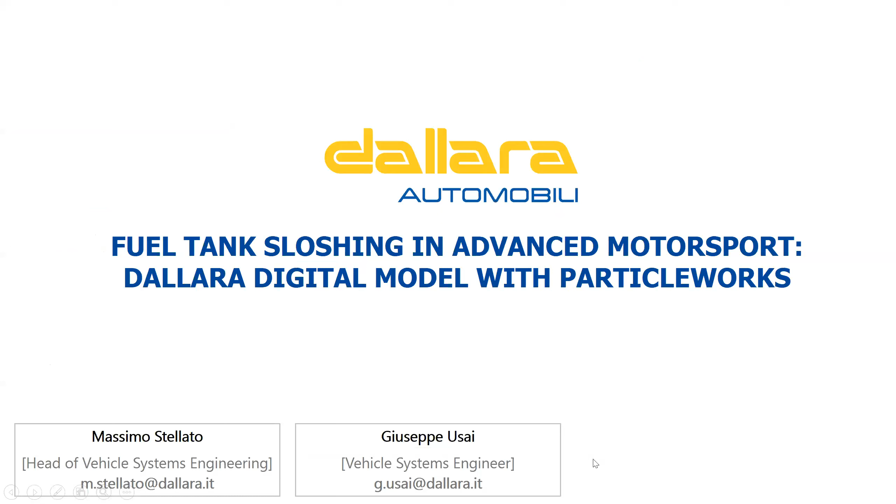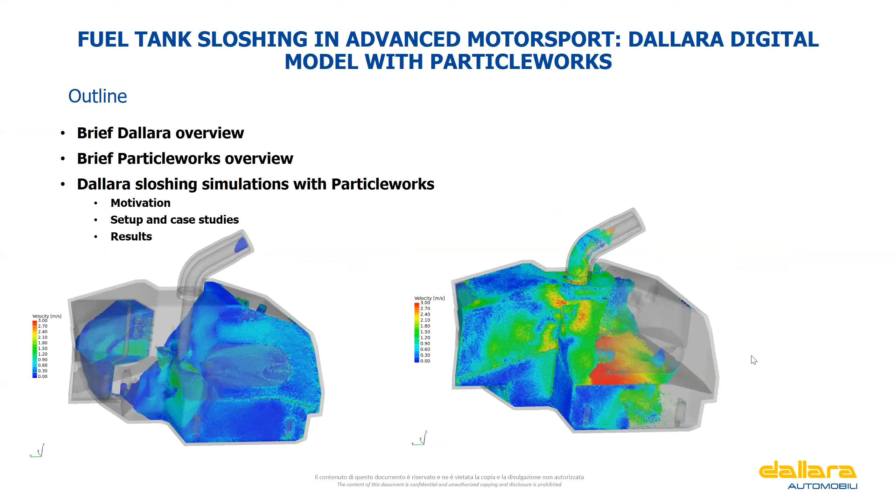I'll provide you a short outline about what we will discuss. So we will speak shortly about the Dallara overview. After that, Michele will speak about Particleworks, and in the last part, Giuseppe will go in detail about the sloshing activity.

So, Dallara, some words about Dallara. We are a community that invests every day in a sustainable way for a better future and gives support, security, and solidarity to its people, family, and its territory with appreciation and gratitude. Our mission is to design and produce the fastest and safest cars in the world.

We are around, currently, 750 employees. We export outside Italy more than 90% of our product and service.

If we see our sales by business unit, we are involved, as you know, mainly in racing, 72%, an important part in the automotive field, 25%, but also growing is the part relative to aerospace and defense, currently 3%.

Typically, our business model is production for customers, 24%, engineering for customers, 28%, and engineering and production of Dallara brand, 48%.

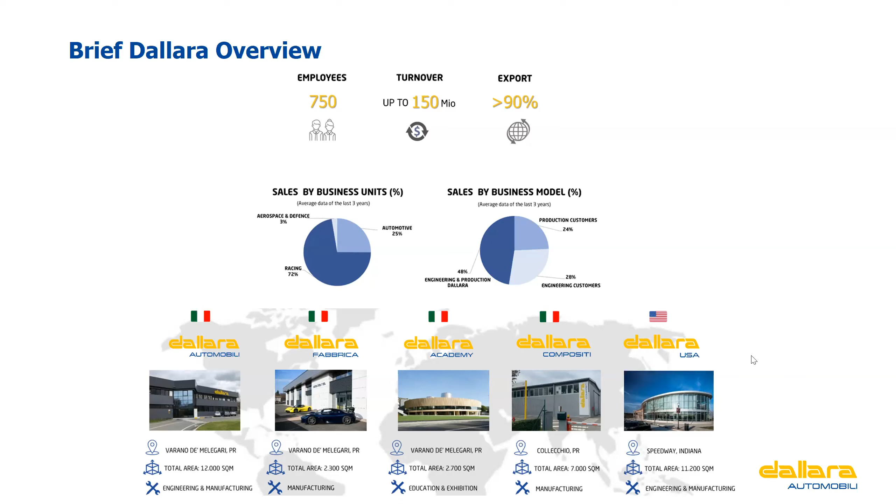Here you can see the main milestones about Dallara, which was founded in 1972. The first model was a race car, a three-seater race car. In 1978, the first Formula 3 chassis, and the next year we had the next Formula 3 car. So we have always, from the beginning, worked in this championship.

In 1984, the first wind tunnel. After that we produced the first carbon fiber chassis. We started to work in 1988 in Formula One, and in 1998 in IndyCar. In 2000, we developed the first Veyron for Bugatti, which is a very important customer for us.

In 2011, we developed our driving simulator. In 2012, we opened the facility in Dallara USA. After that, we started with DARC and Dallara Compositi, and in 2017 we produced the Dallara Stradale.

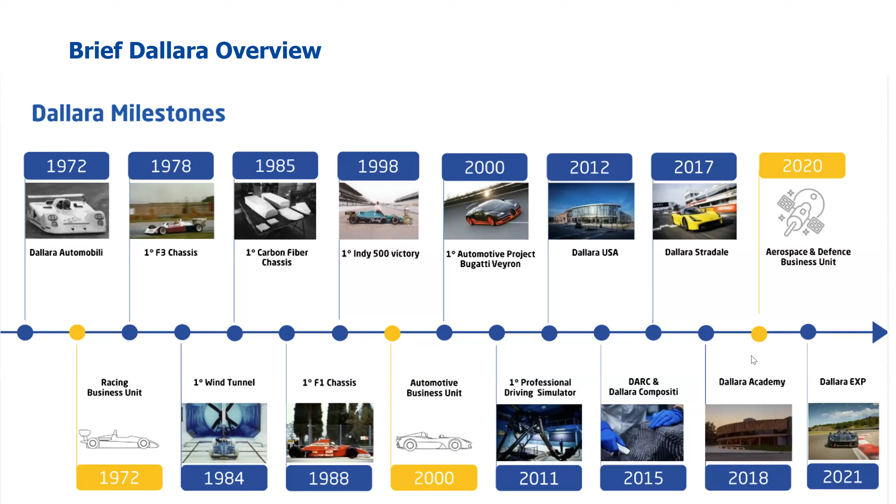Here you can see the main business units, which are racing, automotive, and aerospace. For each one, we provide engineering consultancy. We are involved with prototype and series production, service, and also race and worldwide spare parts support.

Here you can see our main competence, which are lightweight design and structural optimization. We work massively with simulation in a holistic way, so with all perimeters typically together: vehicle dynamics, passive and active cooling system, but also ICE and electric powertrain.

Another competence is aerodynamics, electronic architecture and development, production and assembly, and also indoor and full vehicle outdoor testing. We have dedicated test benches, cooling rig, chassis rig, and poster rig, but we also follow the track validation of our car.

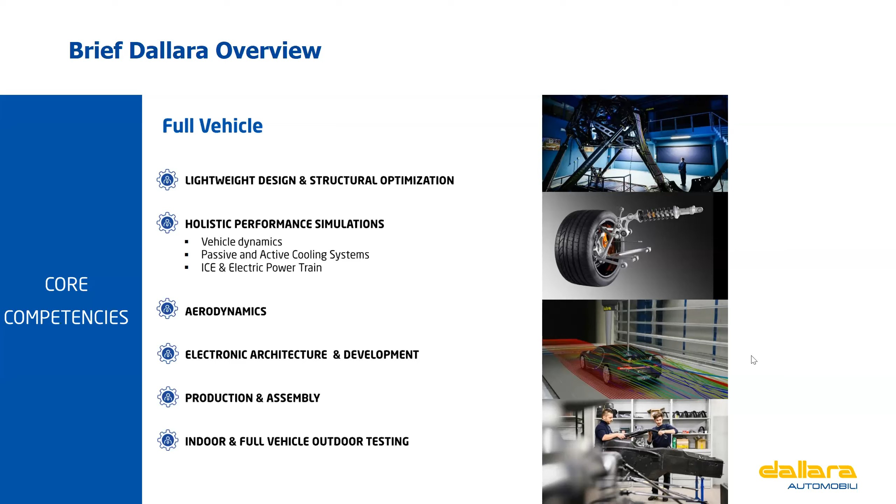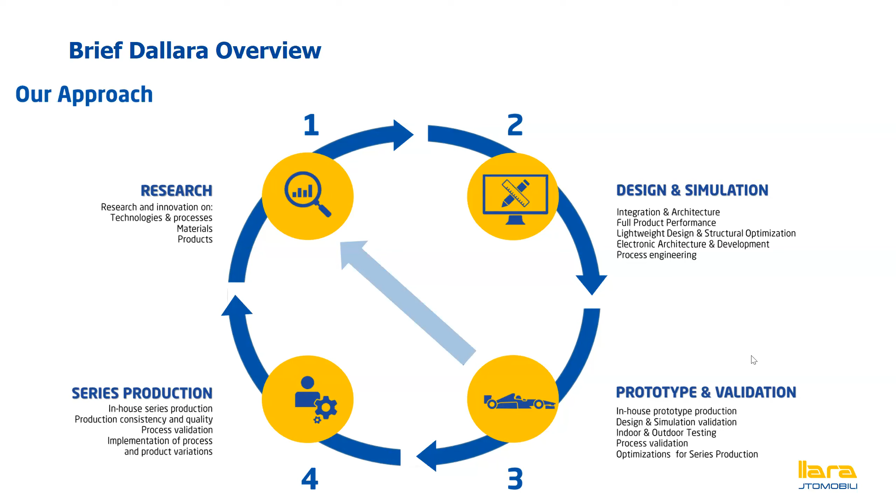Here you can see our main approach, which is very important for us. The first step is research, where we involve massively our resources, design and simulation. After that, prototype validation, and at the end, series production. There is continuous interaction between all these steps, in particular between the research and the prototype and validation.

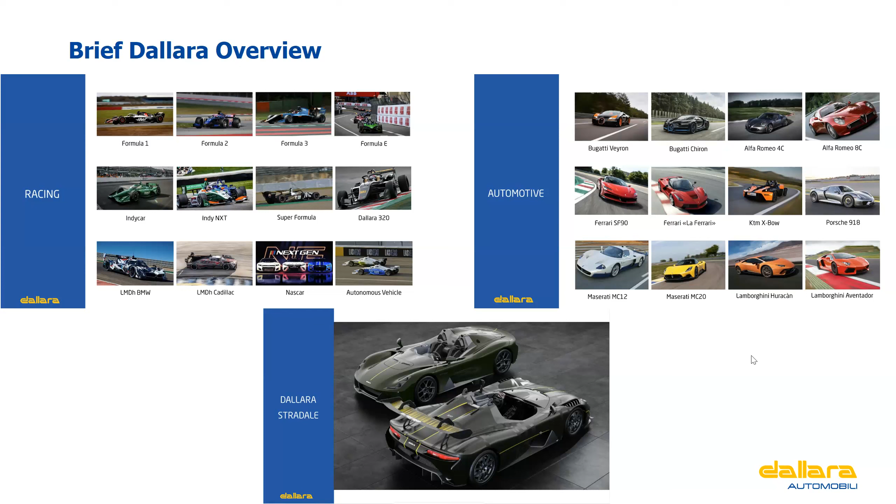Here you can see our main products, not all of them because many projects are confidential. Here are reported the projects which are public. And at the end of this last part, these are the activities that we perform inside the Vehicle Systems Engineering department.

In particular, we deal with the calculation and simulation about cooling systems to size and define the layout of ICE, electric, and hybrid vehicles. We perform holistic simulation with vehicle dynamics and systems together. The sloshing simulation is the topic that we speak about today.

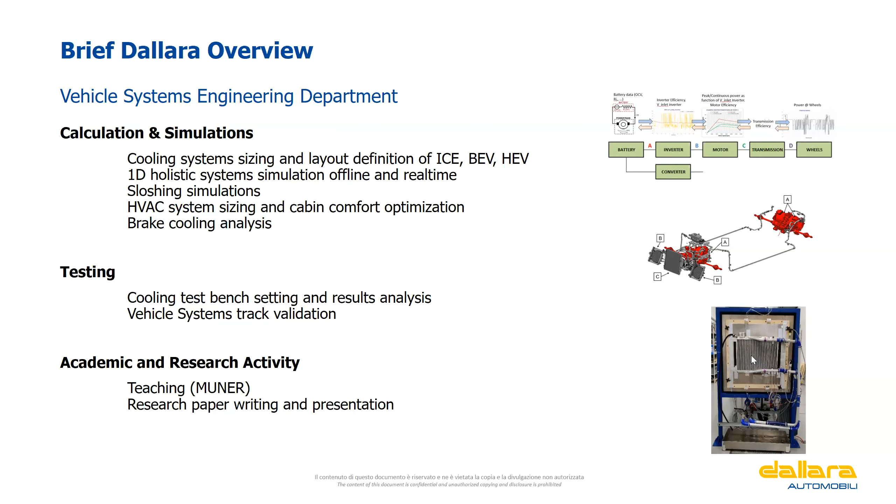Also HVAC system sizing and cabin comfort optimization and brake cooling analysis. Further than that, we are involved also with testing. Indoor testing, we have a dedicated cooling test rig where we measure and validate all our heat exchangers, but also we follow all the system validation during track test. At the end, we're involved also in academic and research activity. So we teach it. We have at MUNER a complete course about the cooling system.

Now for this first part, just about Dallara, I finished, and I leave the speech to Michele. Perfect. Thank you. Thank you, Massimo, for your kind introduction. And just please confirm that you can see my screen. Yes, we can see. Okay, perfect.

So I will just take on briefly introducing the methodology, the fluid dynamics methodology that will be used and that was used by the Dallara team. And it's based on Particleworks. So Particleworks is a meshless CFD, computational fluid dynamics tool that is widely used in the automotive sector.

The method is a meshless approach based on moving particle simulation. So it basically solves all the traditional CFD equations, but with a Lagrangian type of approach. Basically the fluid is discretized automatically by the software into particles, and those particles are tracked during the solution. So we can see here that whenever we have a system with complex geometries, splashing and sloshing, or acceleration that will cause the fluid to move around in a gearbox or in a tank.

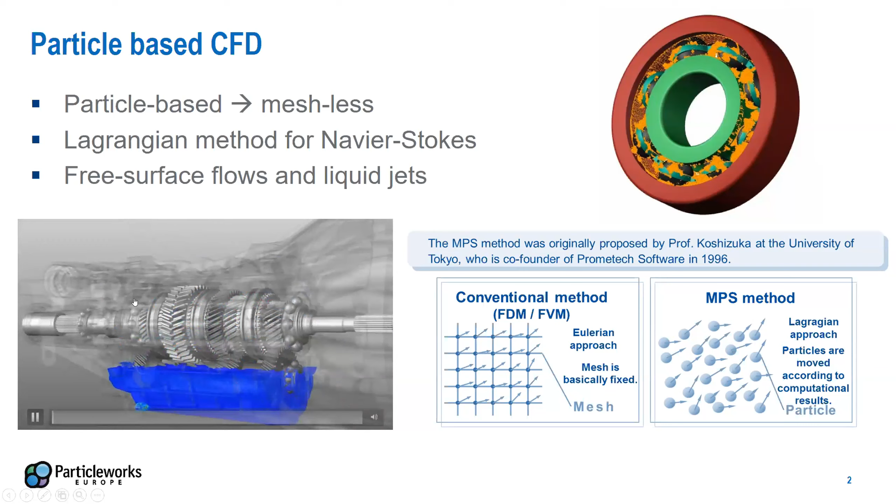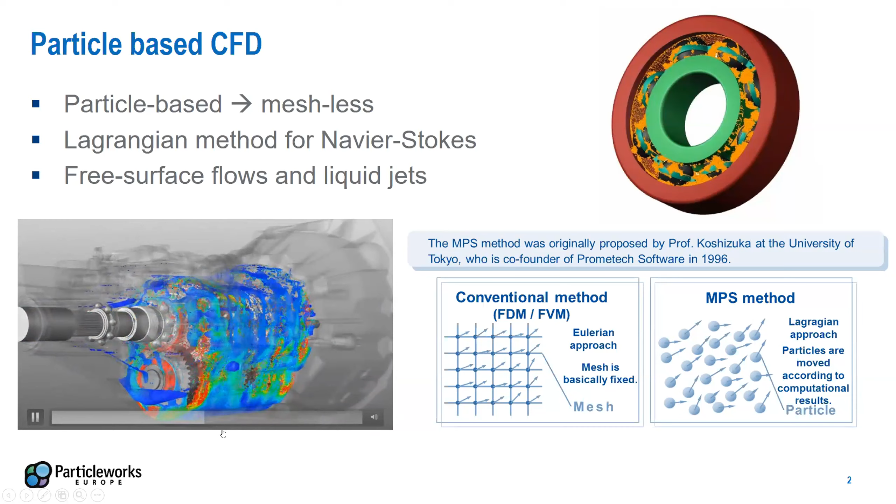So for this kind of system, really this method, as compared to conventional mesh-based CFD, can show real advantages. In fact, the pre-processing steps are much shorter. Usually we can directly work with the geometry as complex as we would like. And the hardware time, the simulation time, is actually way shorter whenever we are dealing with the flows that I mentioned, so splashing phenomena, sloshing, and so on.

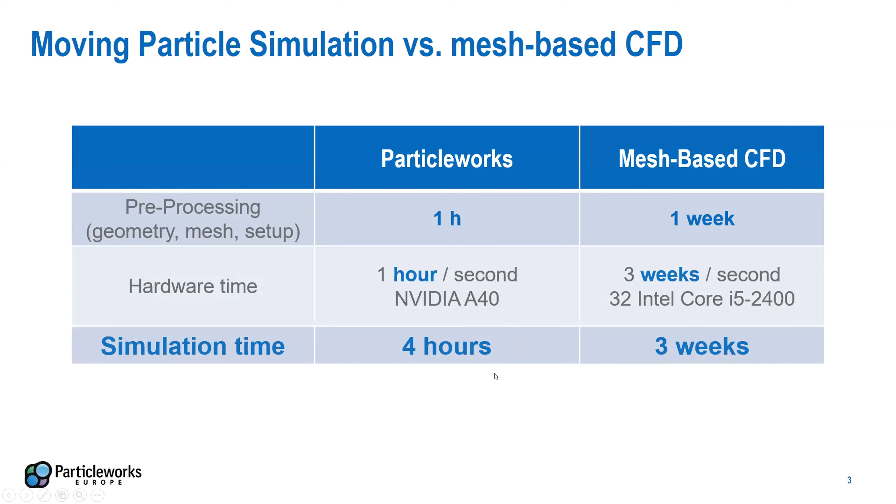So for this kind of application, as compared to mesh-based CFD, we are looking into hours, or let's say 1 day of simulation instead of weeks. So in general, the features are that we don't need to prepare the CAD for simulation in this method, so we can directly import it, and that was done with the Dallara fuel tanks.

It's very simple to model the fluid dynamics, so we don't need to have CFD experts or engineers specialized in numerical modeling for this kind of system and application. And we can also leverage GPU computing, graphic card computing, to speed up the solution of our simulation, because the methodology itself can be parallelized very efficiently.

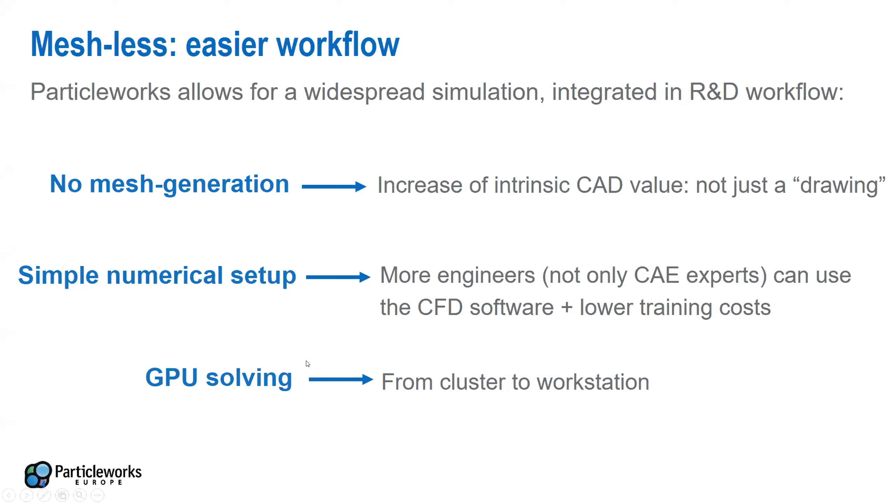So showcasing a little bit of the features of the software that will be discussed, one important feature that was integrated in the sloshing simulation is the ability in Particleworks to discretize solid elements with particles. So we are not only dealing with the fluid and the fuel, but as you can see in this example, we can handle solid material. In this example are screws floating and experiencing the fluid forces. But in the example that will be discussed are Teflon spheres integrated in the tank and interacting with the fluid.

So this is another feature that is very interesting and that was used by Dallara to improve their design. Effectively, you can build a fluid structure interaction between the fluid phase and the solid phase in one digital interface, in one digital solution that is Particleworks.

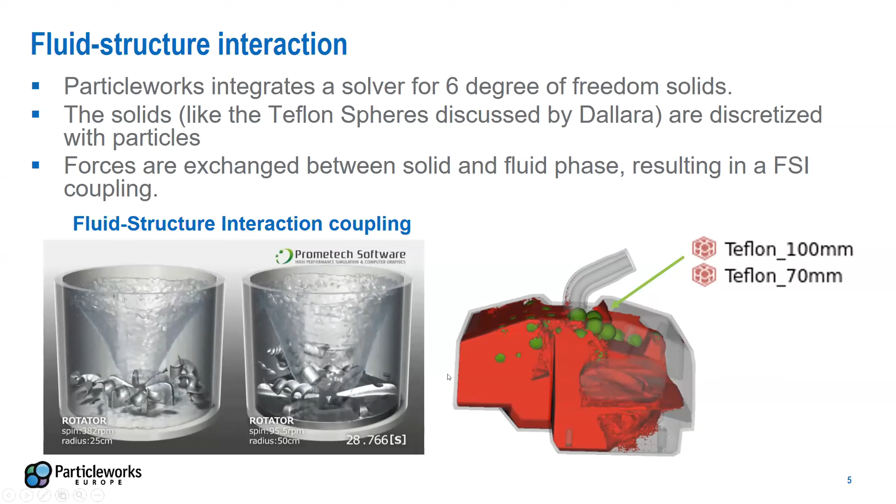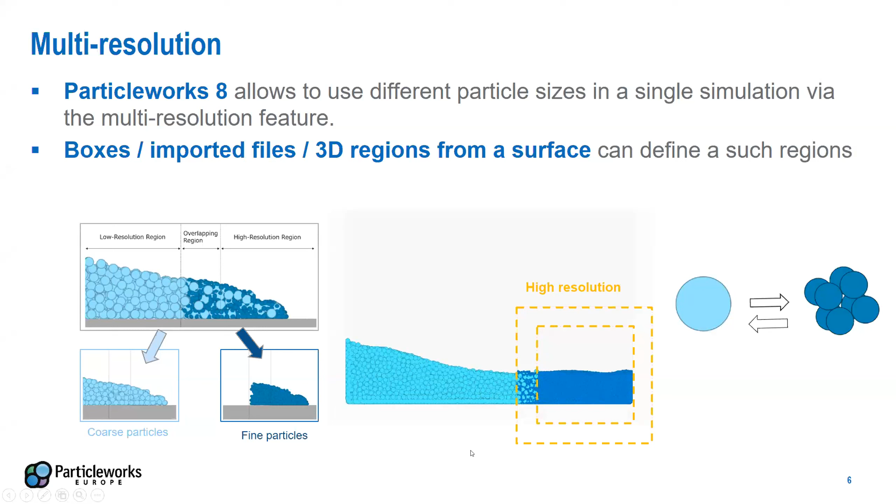So effectively, we improve our computational time instead of having to solve for all the fluid domain with the very small particle size needed to capture the flow near the pump. With Particleworks, we can define region boxes, or actually we can import files defining the custom shaped region we want to have for this kind of high resolution area.

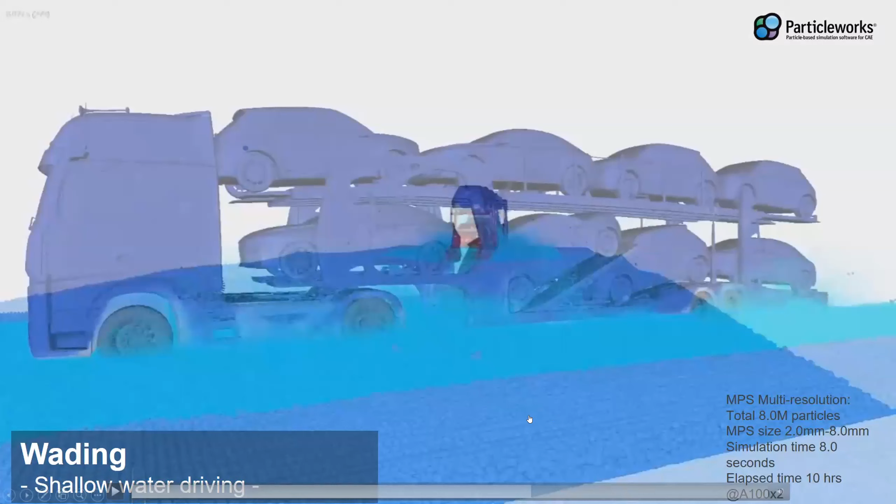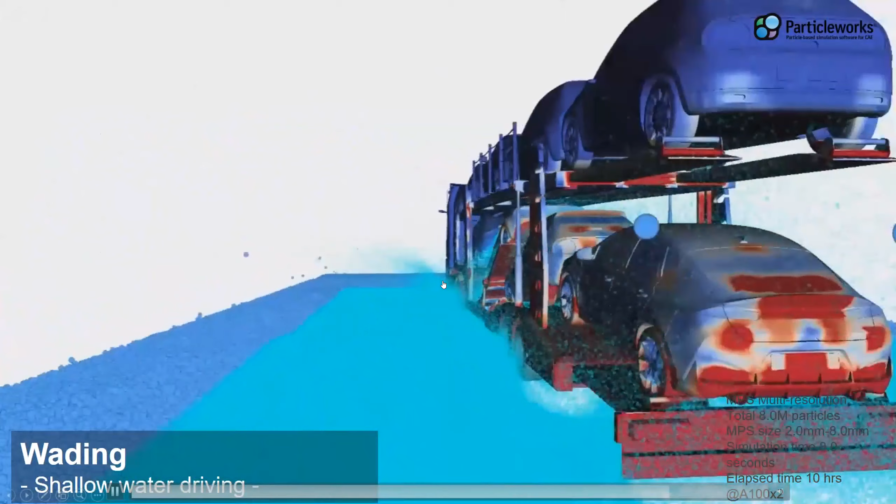Here is an example in vehicle, external vehicle contamination and interaction. So we have some wading of a big truck with a lot of cars on top of it. And as you can see, maybe you can appreciate that farther away from the truck, we have bigger particles that are refined and meshed with a smaller feature very close by to the truck. So in this way, we have better splashing phenomena very close to the bodies, but where we don't need high resolution, we just keep the particles a little bit bigger.

And here is another example for a wading type of application. Basically, we want to analyze the amount of water that could be intaken by the car body, and that could enter the cooling system, for instance, from the front of the car.

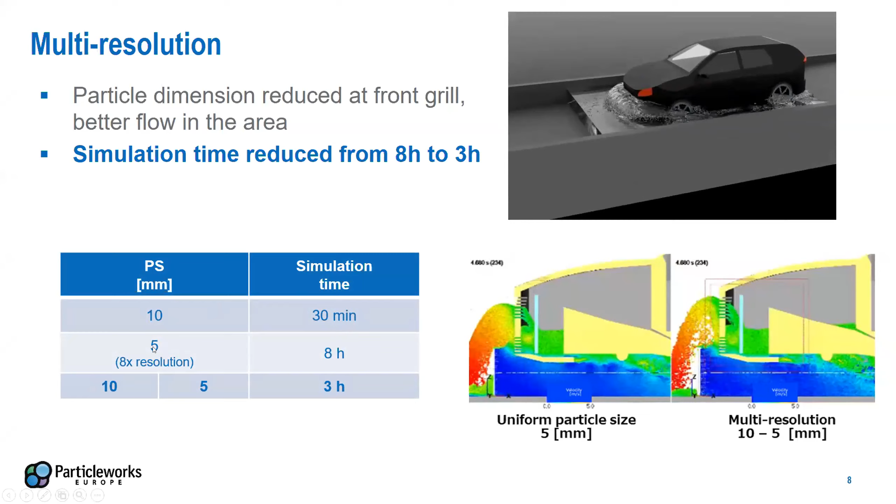As you can see here, we could have very small gaps that would need a particle size of 5 millimeters, in that range. But if we discretize the entire fluid domain with that particle size, we are looking at 8 hours of simulation time for the whole simulation.

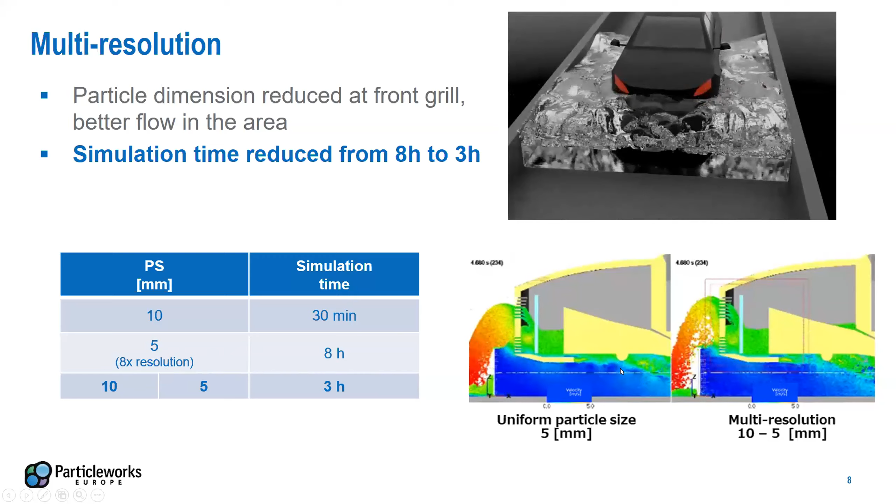If we take advantage of the multi-resolution approach, you can see here the box. We can define 5 millimeters only inside the box, and overall we reduce the simulation time by a factor of 2 or more, while guaranteeing that the higher resolution is present in the desired area.

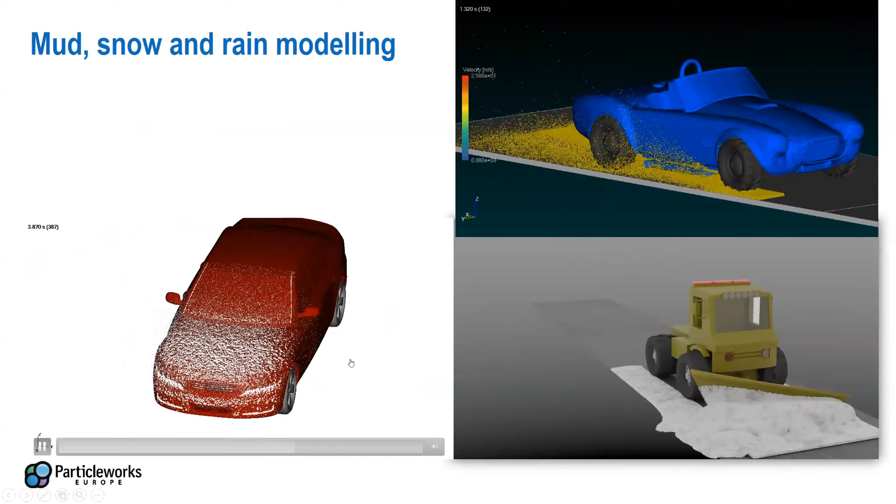In terms of physics, we don't only simulate water or Newtonian fluids. We can integrate snow, mud, with different types of modeling, also rain simulation. What you see here is a transient air field, computed again inside Particleworks. So the software can handle fluids, but also air simulation, coupled or solved beforehand. We can integrate different physics, different phenomena, in one workspace thanks to that.

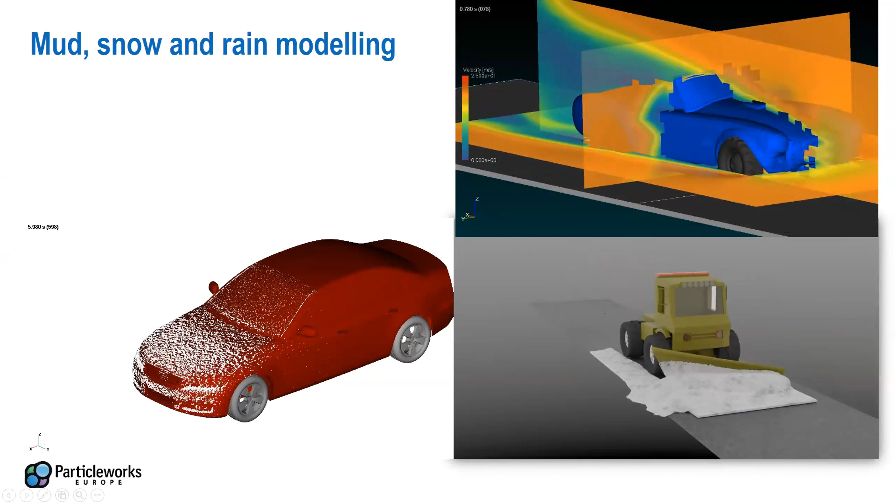So this was it on the features. Again, I focused on vehicle application. Of course, there are many other applications in terms of transmission, bearings, lubrication, e-motor cooling, or other fields not related to the automotive sector. But since today we are talking about vehicles and motorsport application, I just wanted to give an overview of the application in this direction.

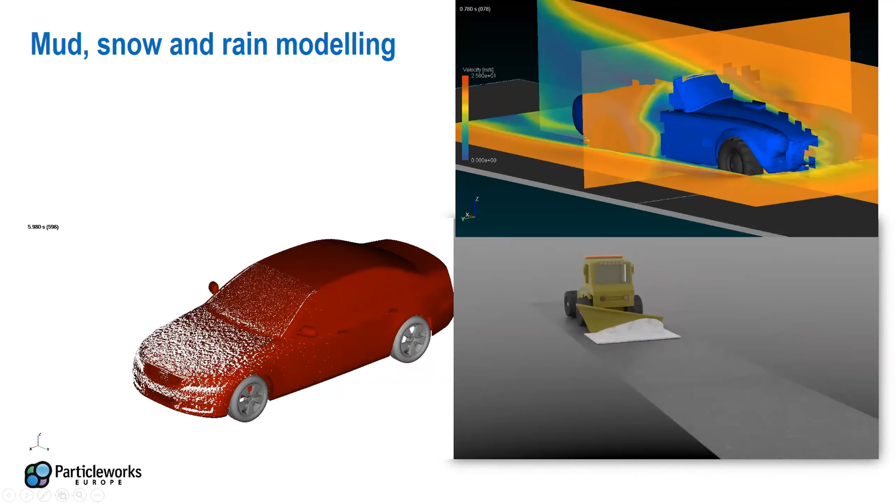So now I will stop sharing my screen and give the floor to Giuseppe for the main results.

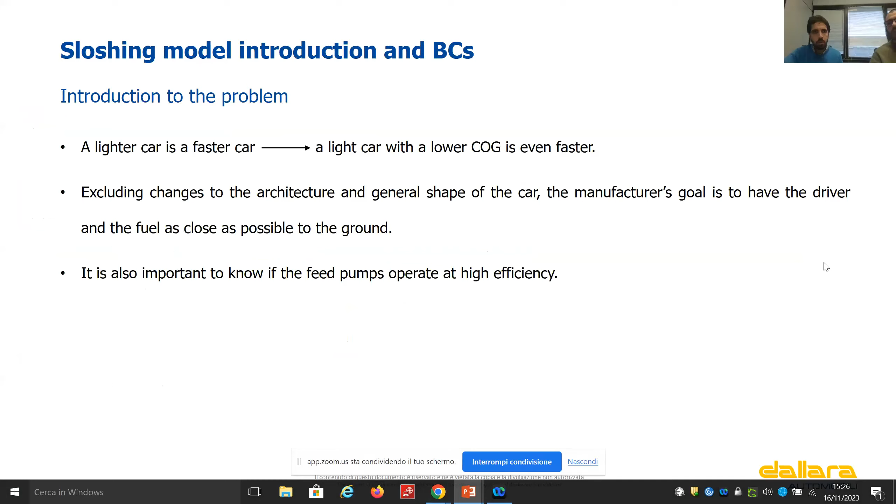Very good. Okay, you can hide maybe the bottom. Yes, at the bottom. So, yeah, perfect. Thank you. Okay, sorry for the inconvenience. Sometimes it happens.

So I was saying, I wanted to give a small motivation to explain why we need such tools in our products. Of course, the first point of interest is to improve the design, meaning in our case to limit the fuel center of gravity movement and also to maximize pump efficiency.

This is mainly a problem of reliability for the whole car, because the fuel needs to go to the engine. We don't want any engine cut off at any point in the race, even when only a few liters are left in the tank and the car is about to go into the pit stop.

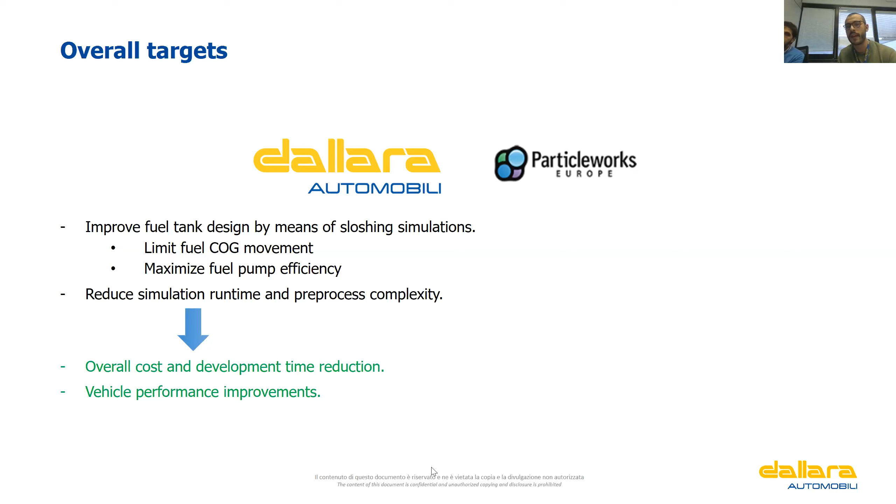And the second point is to reduce simulation runtime and pre-process complexity. In fact, as I will discuss later, we used to perform such simulations with traditional CFD tools using common finite volume methods. But then we decided, with the support of Particleworks, to test the software and see if we could actually have an advantage on the track.

So why do we need such simulations? Everyone knows that a lighter car is a faster car, but on top of that, if we have a light car with a lower center of gravity, the car will be even faster. So it is important to study how the center of gravity of the car evolves around a lap.

And of course, we have the two contributions: the center of gravity of the car itself, the chassis, and then the one of the driver and of the fuel. So excluding changes to the architecture and general shape of the car, our goal as manufacturers is to put the driver and the fuel as close as possible to the ground.

And by that I mean that if I'm designing a GT car, I can't have the driver seated as in a formula position, and we have to follow a lot of constraints given to us by the organization, often the FIA. So on top of these constraints, we try to limit the fuel sloshing and have the driver seated as low as possible.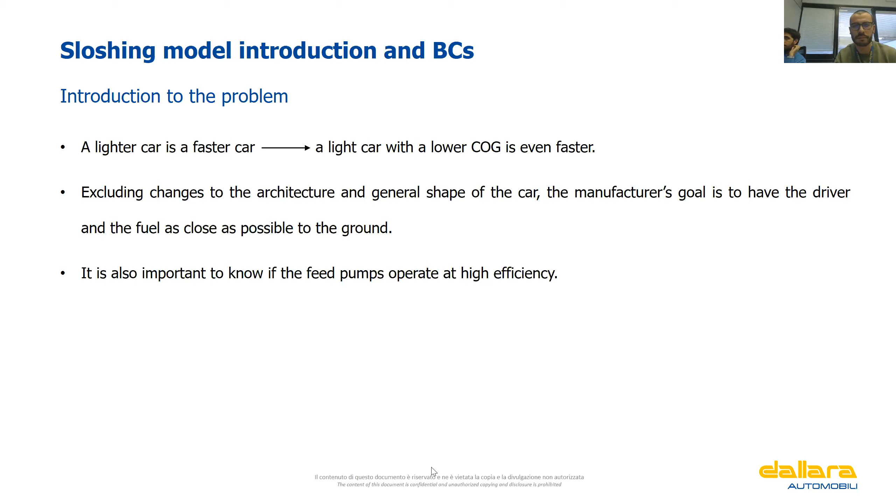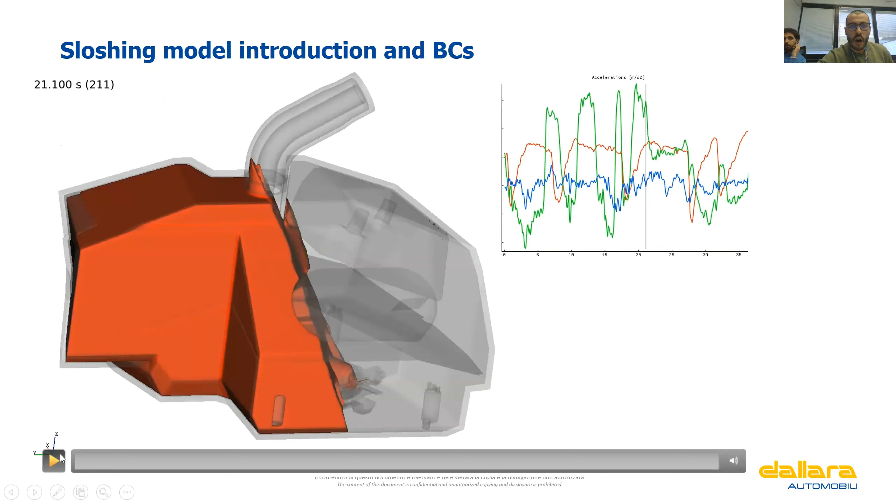This is a portion of one of the simulations that we performed. On the right, you can see the acceleration profiles. In blue, the vertical acceleration, that is this direction. You can also see the axis on the bottom left. With red, the x direction, normal to the screen surface, let's say, and then the y direction, that is the lateral direction.

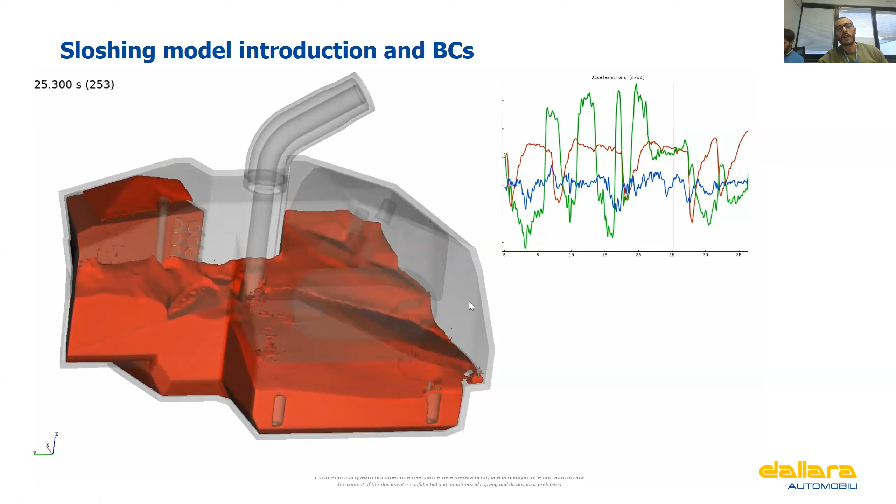So in this small segment, we see a portion of accelerations in which the car is first in a stable condition with almost constant lateral and longitudinal accelerations, and then we have a rather strong transition with heavy braking, then acceleration, and then also cornering, first to the left and then to the right. And we can appreciate here the result that we obtain through Particleworks.

So now, going more in detail on the boundary conditions.

First, we performed a particle size sensitivity study, with the same boundary conditions apart from the particle size. Here on the right, we see the 4 simulations that we performed at the start, and the only difference between them is the particle size.

As a consequence, the time step changes, because that's directly related to the particle size. As the particle size increases, you can see that the time step also increases, and this translates into a lower number of particles, but also, at the end, a lower simulation time.

On the left instead, we can see the inputs and outputs of the process. Of course, we have as an input a geometry that is an STL file of the whole tank, with all the components modeled inside.

We also need the fuel properties, that means fuel density, viscosity, and surface tension. That's really important, along with the acceleration profiles that I will briefly discuss in the next slide.

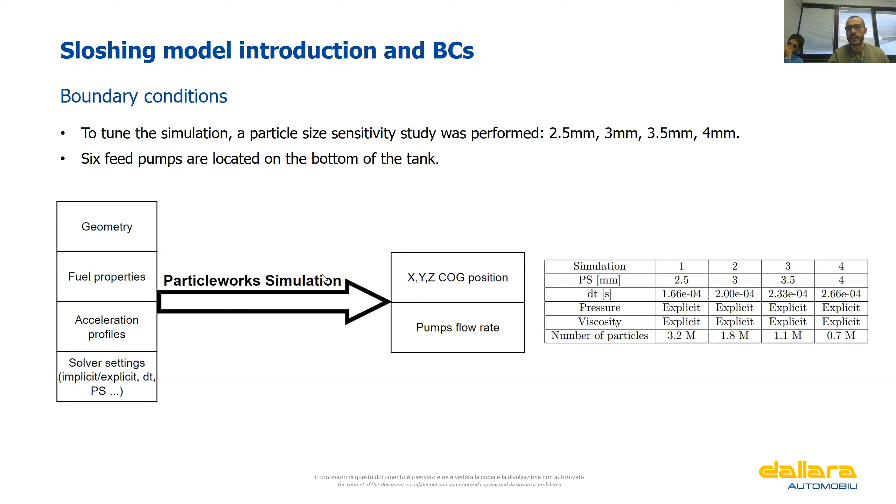So a bit of a deep dive into the acceleration profiles. We set up a 35 second simulation in which the accelerations are varying with time, of course.

This in particular is not a full lap, but is a combination of corners that are deemed representative of the sloshing problem. This means that maybe a lap is

1 minute and a half, but maybe I spend a lot of time in a straight where basically nothing happens. The car is accelerating in a straight line, no lateral accelerations, and after I am out of the corners, the longitudinal acceleration is not enormous, so there's actually no need to spend resources in simulating a condition that is most likely not a problem for the car.

So we selected some corners. Here we can see in blue the lateral acceleration, so we can see some very demanding corners with fast left and right change of directions, together with acceleration and braking phases.

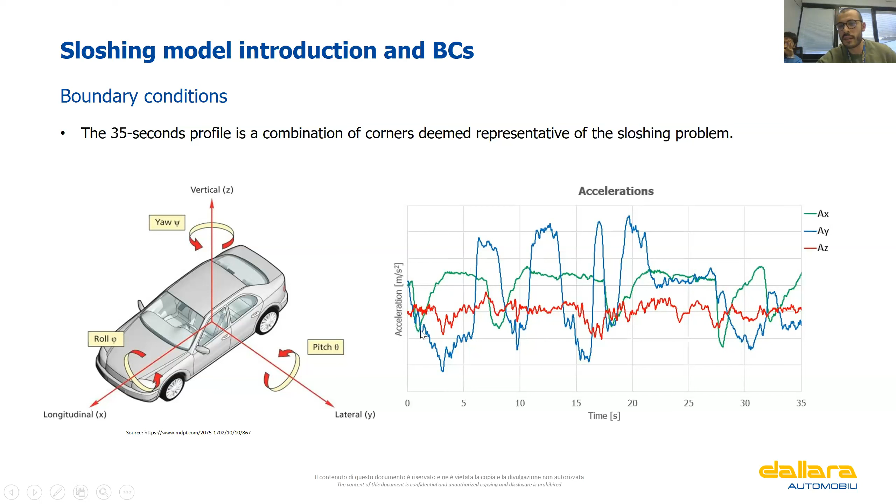So now finally to the results. These are the results of the particle size sensitivity study, in which the goal again is to define and find a particle size that allows us to study a wide variety of solutions in a brief time, but at the same time without any major issues in terms of accuracy. So we want smaller simulation times, but also good accuracy results, because we are engineers, of course, and everyone likes that.

Regarding the X and Y COG positions, we basically see negligible differences between the curves. They're basically all overlapped, one on top of the other. So in this case, we can't really say which is the best, and if one solution is better than the other.

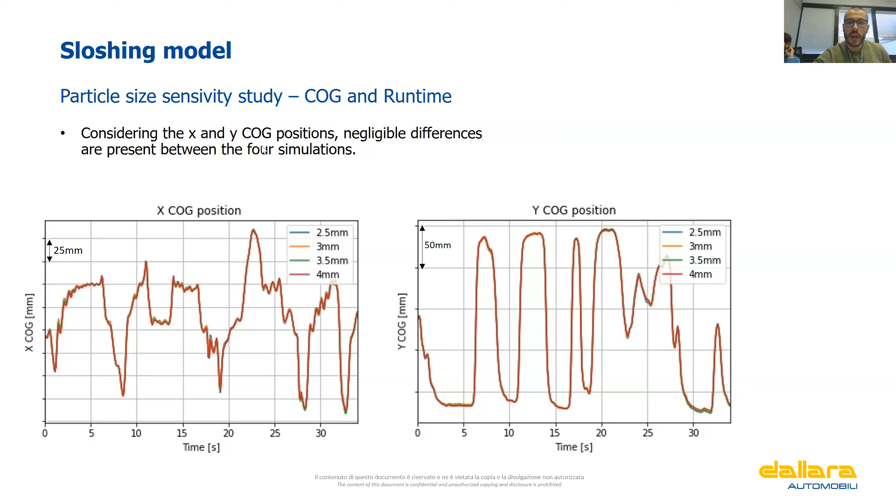When we go instead to the Z COG position and to the runtime, we clearly see an advantage. In particular, when we go to the Z COG position, we see a maximum error of 0.9% when we increase the particle size from 2.5 to 3 millimeters, and that error increases to 1% and 2% if we keep increasing the particle size to 3.5 and 4 millimeters.

The differences here are noticeable, especially in this region, where we see that especially the 4 and the 3.5 millimeter curves, that are the red and the green ones respectively, differ from the 2.5 millimeters. The differences are basically carried in other parts of the simulation as well, such as this last one here, or this transient, this particular section here.

Talking about runtime and the comparison with CFD, we had this experience on this kind of simulation with traditional CFD, as I mentioned before, and in that case the runtime was around 24 hours. Here on the left, we don't see the CFD curve, but it was well aligned with the 2.5 millimeters, and for sake of clarity, we chose to not display that curve in this plot.

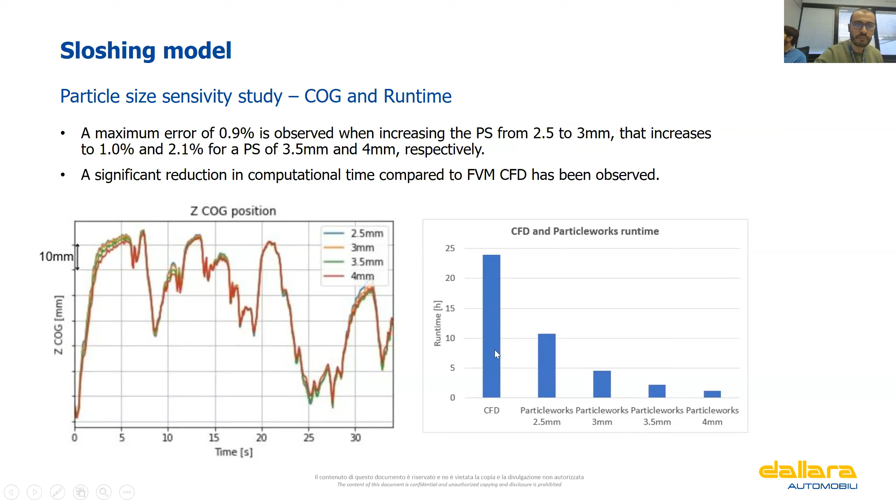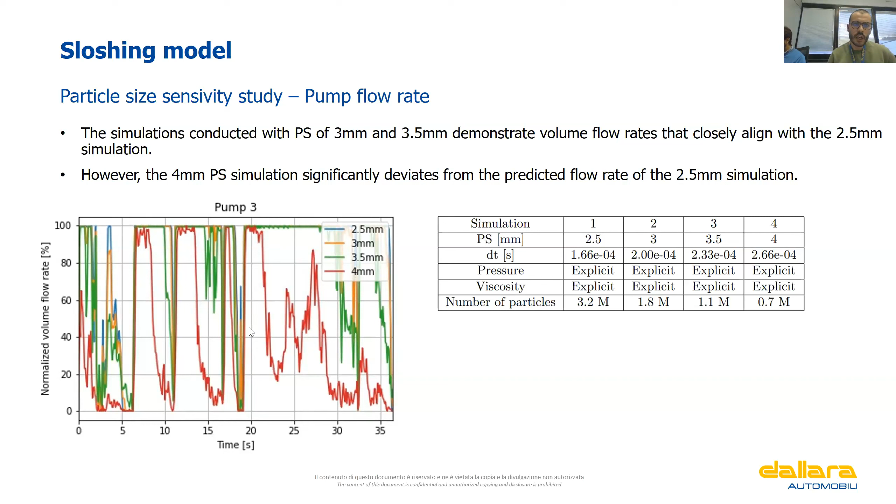So at the end, we chose to set up our simulations with a particle size of 3.5 millimeters, and therefore all subsequent simulations have been performed with that particle size. This was just the first study we performed with the support of Particleworks in order to find the best trade-off between computational time and accuracy.

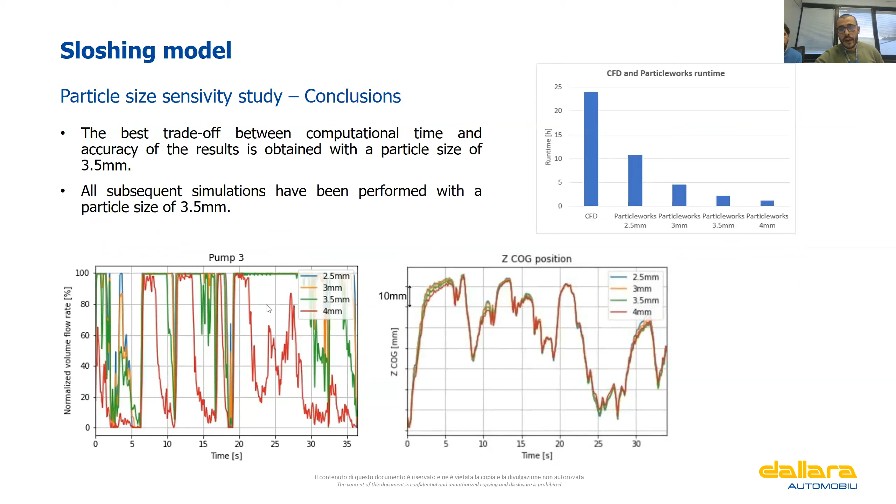And then we performed other kinds of analysis. One of them is shown in the next slides. With the goal of optimizing the center of gravity position over a lap and optimizing the fuel pump efficiency, one can think of different solutions that may involve changing the actual geometry of the tank or of the surfaces and components placed inside it.

But we decided to study a particular solution that involves the use of Teflon spheres inside the tank in order to avoid fuel sloshing. So in this case, we set up around 30 Teflon spheres inside the tank, and we assign them given properties, basically the density. Then the software automatically evaluates the interaction between the fluid particles of the fuel and the Teflon spheres. The Teflon spheres in this case are modeled, discretized with particles of the same particle size as the fluid.

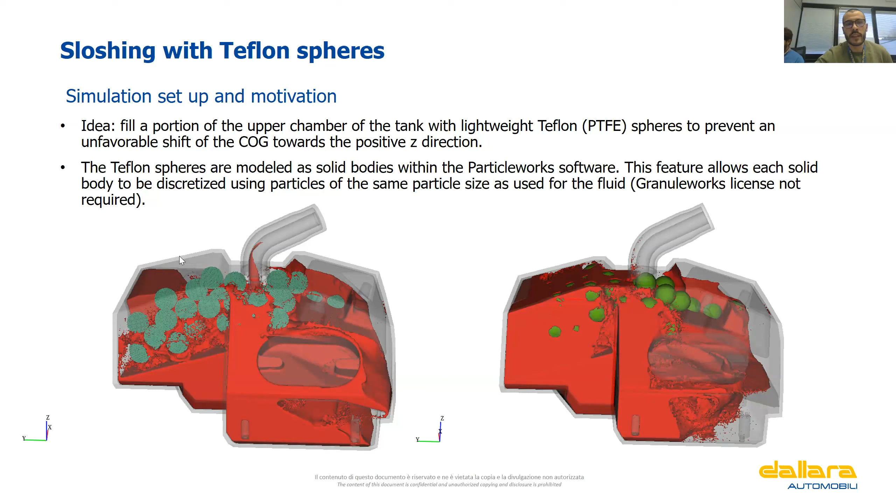So it means that when we look at a sphere with a diameter of 70 or 100 millimeters, that sphere is made of particles with a particle size of 3.5 millimeters. This has the main advantage, let's be honest, that no additional license is needed, because Granuleworks would instead allow only one body as a sphere. In this case, we have a lot of particles glued together to form the Teflon sphere. So now to the results.

Here we are comparing two simulations: one with only the fuel, and another with fuel and these Teflon spheres. In the Y direction, we see a reduction of the COG movement of around 8%, while no significant changes in terms of fuel flow rate were noticed on the fuel pumps.

When we go to the Z and Y directions, we see an interesting result. In the Y direction, the spheres help in both left turns and right turns, because the center of gravity tends to stay more around the center and does not deviate so much from that solution. In the Z direction, we see a 17% lower COG of the fuel compared to the condition without any Teflon spheres inside.

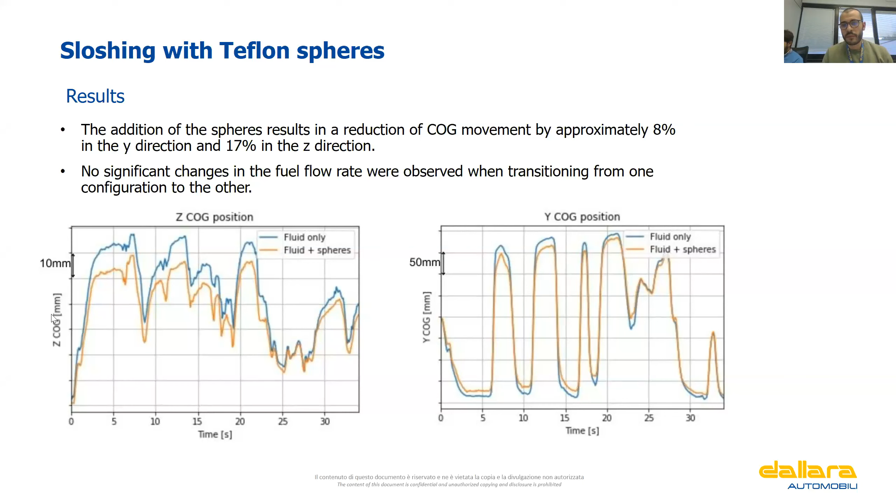We are now at the conclusions. As I just said, the moving particle simulation technology allowed us to effectively study what we wanted to see: the center of gravity variation during a transient maneuver of a race car, and also the pump efficiency. We have verified that the software will allow us in the future to analyze different kinds of solutions, hopefully finding the best one that works on the racetrack.

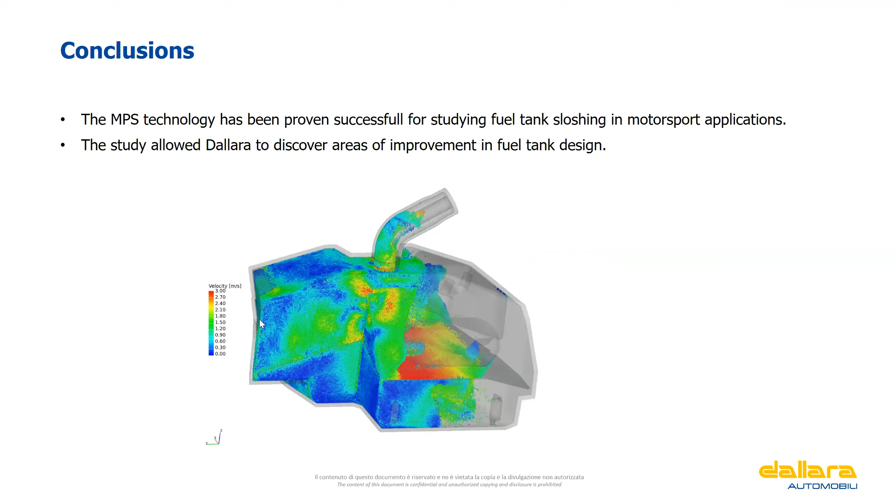One question is about the type of simulation: was it multi-phase or single phase with only fuel? It was a single phase simulation with only fuel. We introduced the solid Teflon spheres, but air was not included in the simulation.

Then there is a question about the range of acceleration used as input in the simulation.

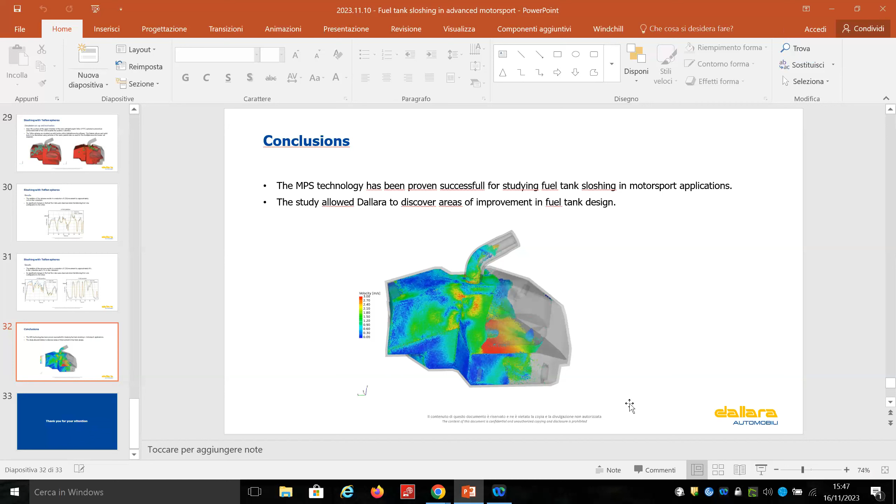I can't really share that information.

Let's say it's a race car, so we're not talking about 1G that my Toyota Yaris can perform when I go home. We're talking about a few Gs. Yeah, we can tell which is a real data acquisition, relative to acceleration profile that comes from real data acquisition of a race car.

And were there any comparisons with testing? If yes, do you have comments on that? For the moment, no. We validated it through our CFD model, which is a consolidated method. As a next step, we plan to have a comparison with the test, but we have to think of the right test because it's not easy.

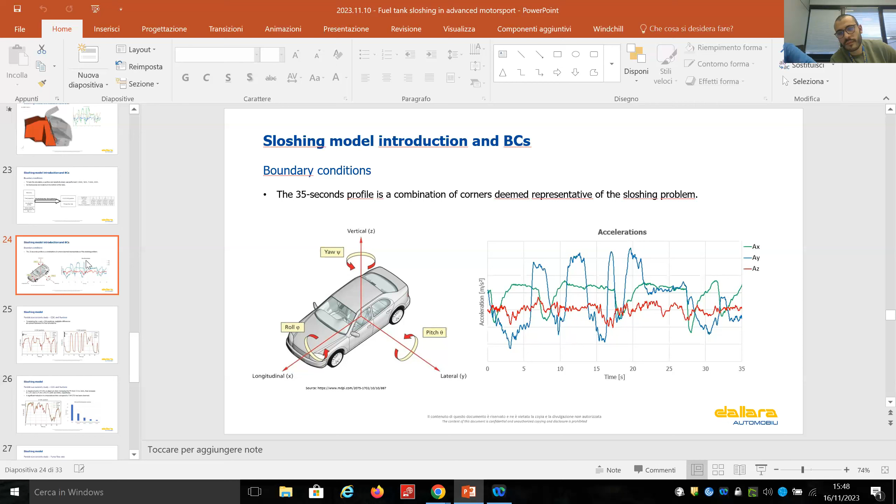Thank you. So the other question is about the spheres, the Teflon spheres. What would be the impact from initial amount of fuel? So you're basically asking if the tank is full at 80% versus 20%, what's the impact on the results in that regard?

At the time, we did not perform such simulations, mainly because we were interested in a sort of intermediate condition. The tank should have not been completely full nor completely empty - let's say a condition where you are half of the stint more or less, with the tank around 50 or a little bit more percent. So we don't have a comparison in this regard to different fuel levels in this simulation.

So then we have a question about the turbulence model. Was it used inside the software? I'd say no, in this case it was not used. It can be handled, but for this kind of application, we don't usually enable it, and the influence of this model was not monitored.

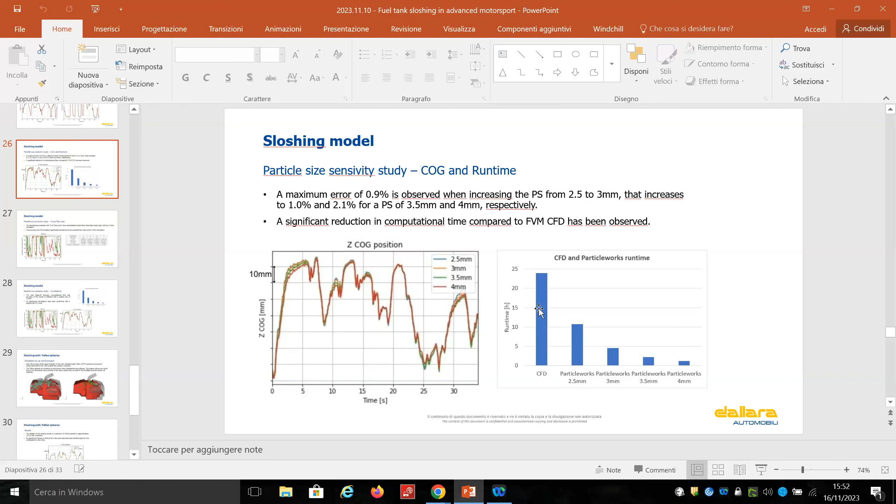Perfect, thank you. So one question about the Teflon handling, maybe I can also answer that. There are two possibilities for the solid: one is the powder with the Granuleworks module, which, as mentioned, would require an additional license for Granuleworks.

The advantage there is that you can define a custom distribution of dimensionality for the spheres, making it easier to set up the Teflon phase at the beginning of the simulation. If we work with the solid discretized with particles, as we did, we needed to import separate spheres and initialize them with particles connected to that solid Teflon element. It's a little longer to set up, but at the end you can achieve the same results and keep only one solution - only the Particleworks solution. I hope I answered, since it was more on the software side, I took that one.

Okay, so again, if you have other comments or curiosities, please let us know.